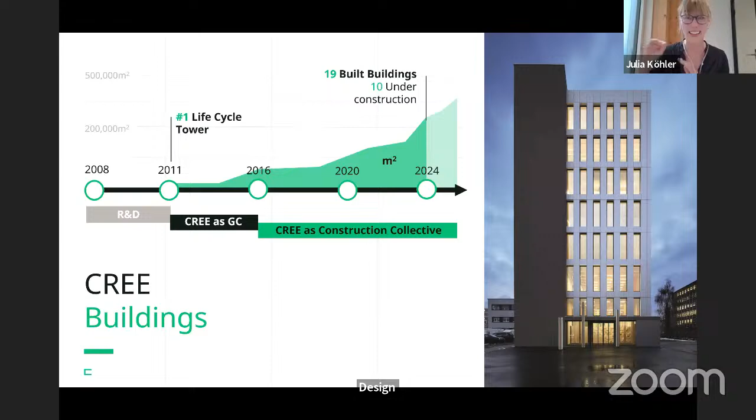That's why we decided to change our strategy and partner up with general contractors all around the world. That's the Construction Collective. In the meantime, we collaborate not only with general contractors but with designers and producers all over the world, and that scales differently than only one general contractor.

All right, so far for Cree's history. Those are the two projects I'd like to show you today.

The one on the left-hand side is the Edge Südkreuz in Berlin, and the one on the right-hand side is the Victoria Park, 1925 Victoria Park, which is going to be built in Toronto at the beginning of 2025. The project in Berlin is an office building, and the project in Toronto is a residential building.

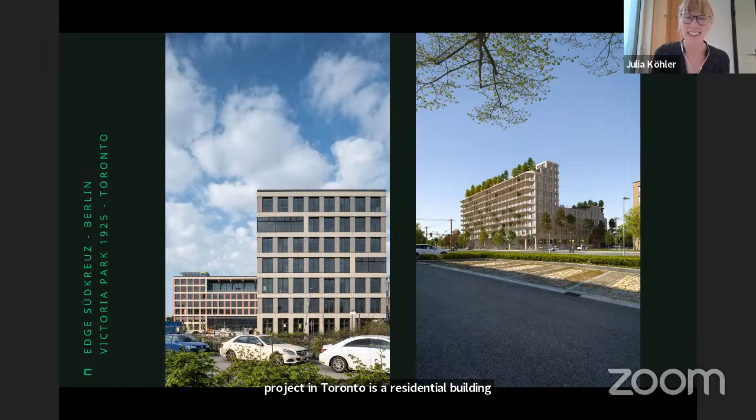So how many elements do you need to build a building? At Cree, we have four key structural elements. Basically, the structure is a skeleton structure.

For the horizontal bracing, we need a core, which is usually a concrete core, but could equally be a steel core or with additional shear walls.

Then the second structural key element is our glulam columns. You see in the sketch that it's double glulam columns along the perimeter and single columns in the corners. Directly attached to the glulam columns are timber frame walls, which are non-load bearing.

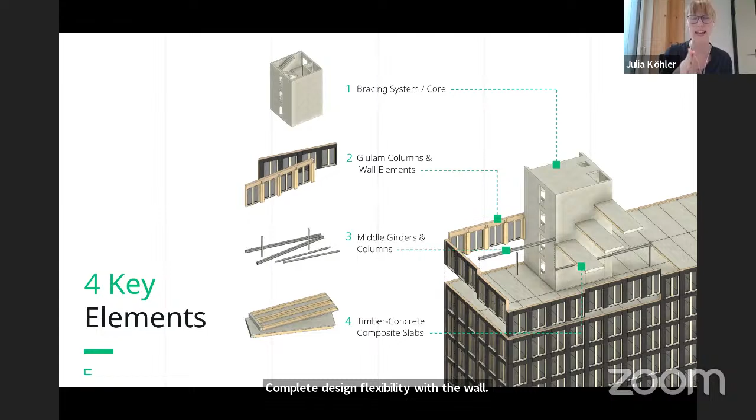So there's complete design flexibility with the wall elements. The third structural key element is our middle girders, just in case the building layout requires greater building depth.

We basically assemble the middle girders, which could be either steel or concrete. And the fourth structural key element is our timber concrete composite slabs. You see it here, it's 4 glulam ribs and then a thin concrete layer on top.

Our approach is not to use as much timber as possible in a building, but to use all materials at their best characteristics to build hybrid, to end up with the most resource efficient structure.

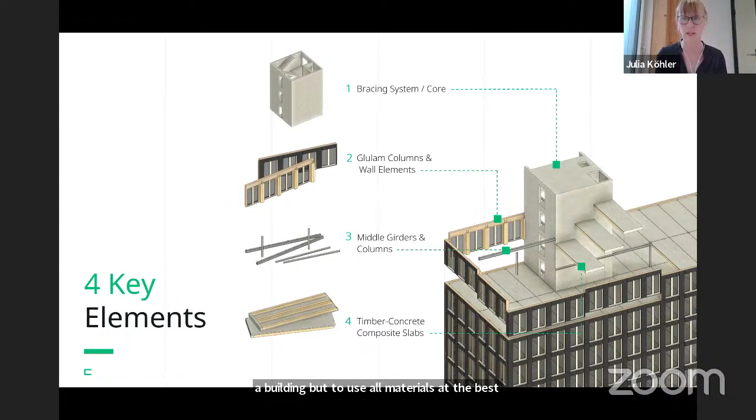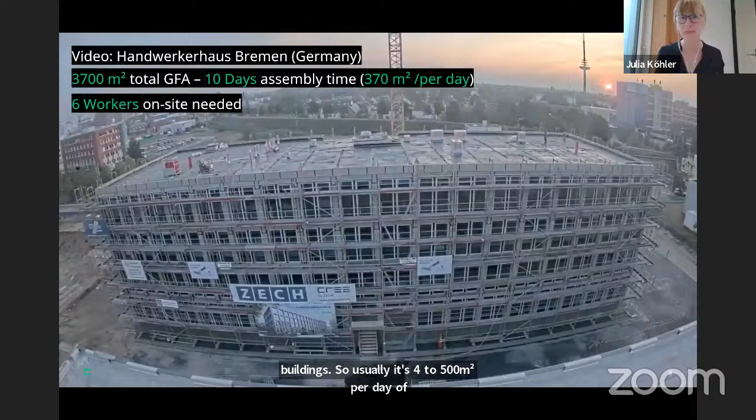This one is one of our buildings, Handwerkerhaus in Bremen. In total, 3,700 square meter GFA, and this building was assembled in 10 days only, so we have a speed of 370 square meter per day. We had even more square meters per day in other buildings - usually it's 400 to 500 square meter per day of weather-tight enclosed floor space with only 6 workers on construction site. So there's 1 crane operator and 5 more people just checking how these fully prefabricated elements come together.

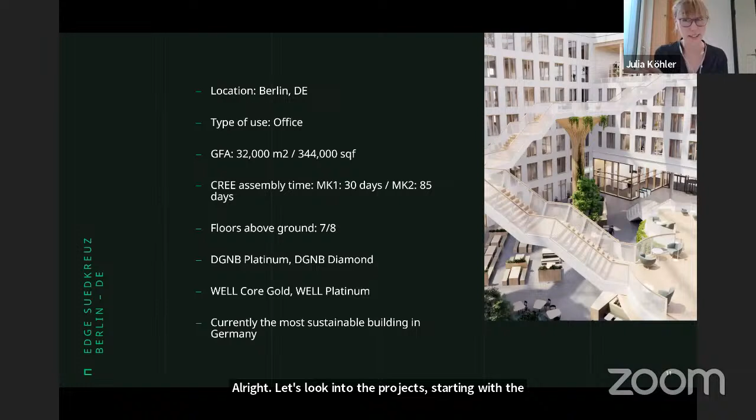All right, let's look into the projects, starting with the Edge Südkreuz in Berlin. Some facts and figures - I'm German, so you'll get some facts and figures from me.

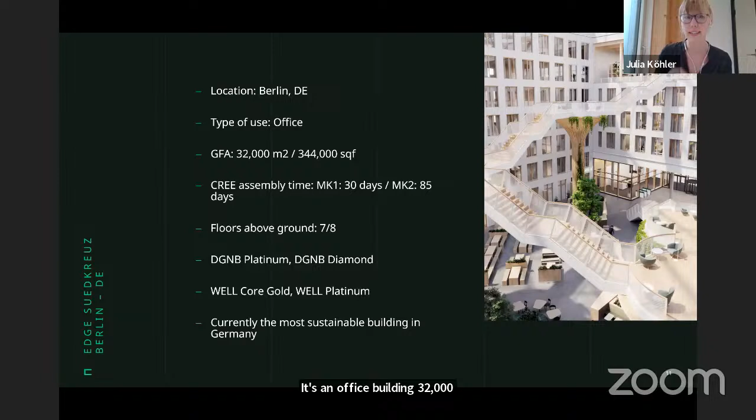It's an office building, 32,000 square meter. Cree system assembly time, what I just mentioned with the 10 days for the other project, was 30 days for the one building and 85 days for the second building, MK1 and MK2. The one is 7 stories, the other one 8 stories. This project won a lot of prizes: DGNB Platinum, DGNB Diamond, WELL Core Gold, WELL Platinum, and is currently the most sustainable building in Germany.

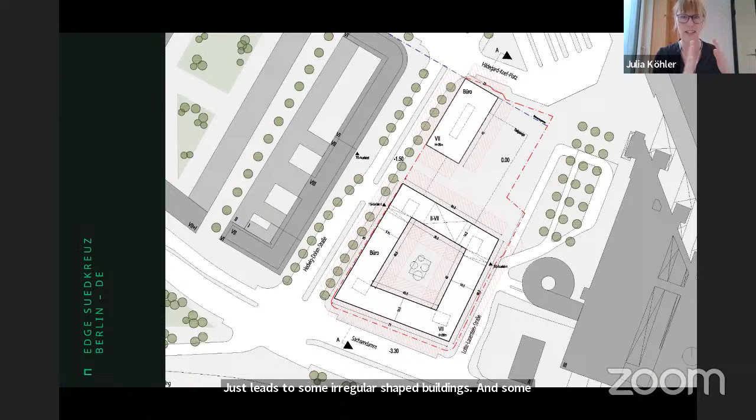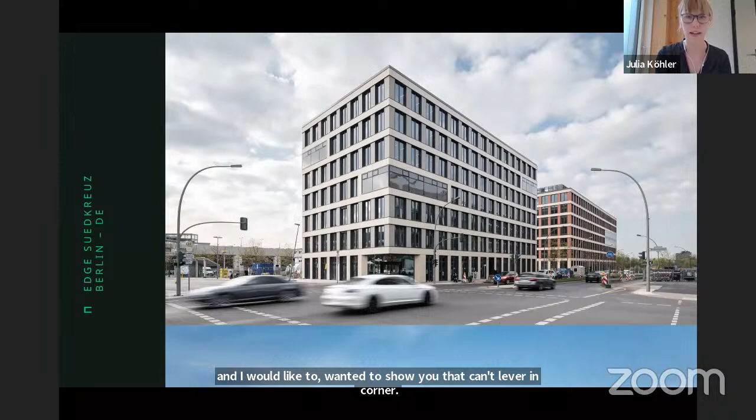So that's the project during construction. Then I wanted to show you some specifics of the project. This is a photo of the rectangular building, the MK1, and I wanted to show you that cantilevering corner which we incorporated in that building, and then for the MK2, that sky lounge. What I wanted to show you with these two is that you can include some special designs in your buildings, even though it's a fully prefabricated system with a very regular grid.

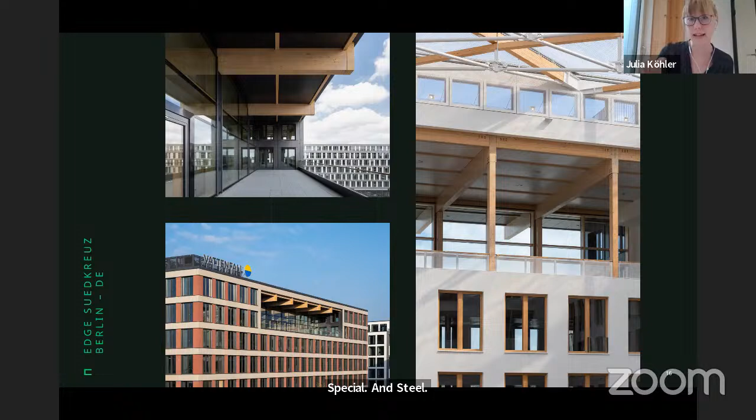So for these two, we just incorporated some special steel structure. This is the sky lounge from the inside and outside, which was timber structure.

And this one is a look into the office building. You see that regular grid of the double glulam columns on the outside, and then the double glulam ribs, which is this very typical Cree look. And then this one is a photo of the atrium in the MK2 with these tree structures, and then with the stairs, you get into every single story of the building.

Okay, the second project I would like to show you today is the 1925 Victoria Park in Toronto. It's a mixed-use apartment residential building, 18,000 square meter in total, 168 family-oriented units and 12 floors above ground.

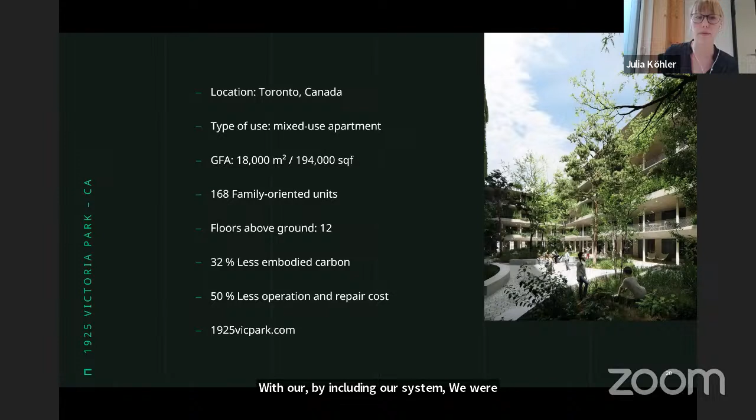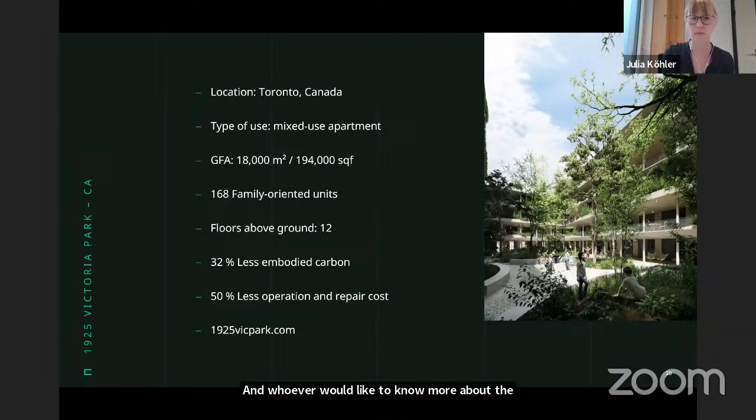By including our system, we were able to have 32% less embodied carbon compared to a conventional structure and 50% less operation repair costs. And whoever would like to know a bit more about the project, I put the project website there: 1925vicpark.com.

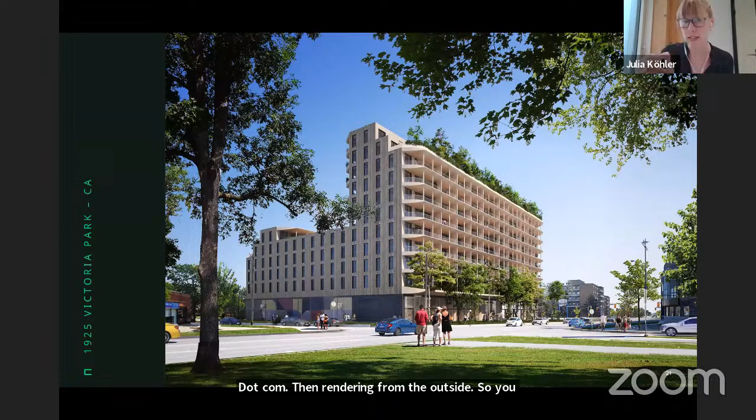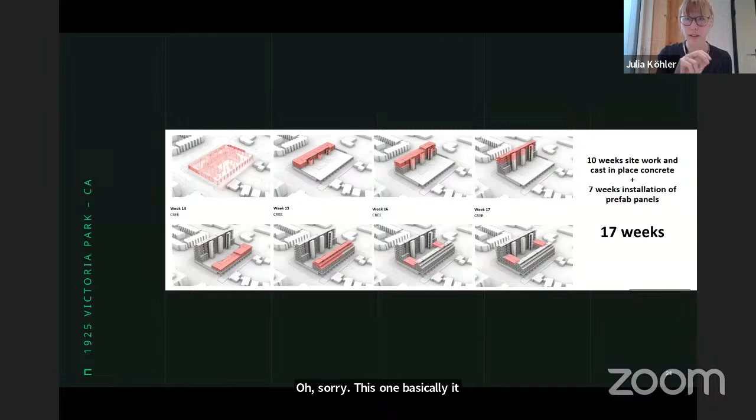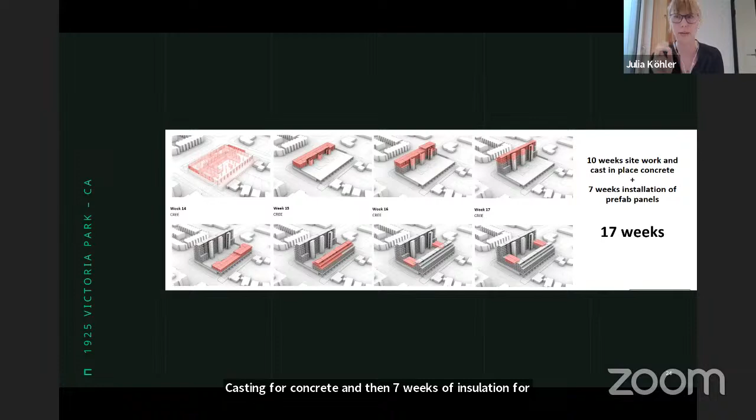And then this one basically shows the schedule for the building, which is 10 weeks of on-site casting for concrete, and then 7 weeks of installation for the Cree system. Remember, it's 18,000 square meter for this very building, and it'll be assembled within 17 weeks total.

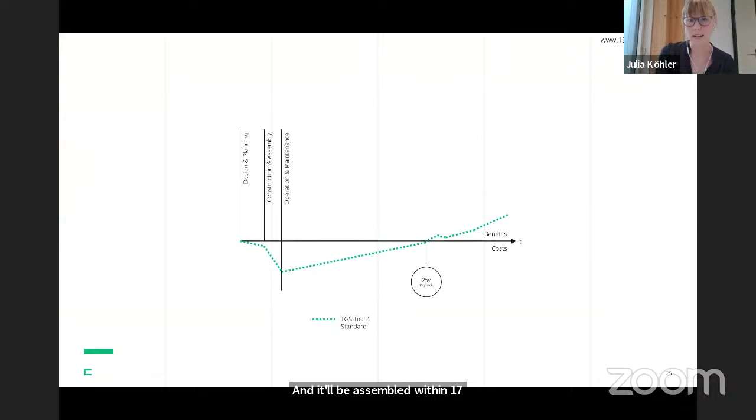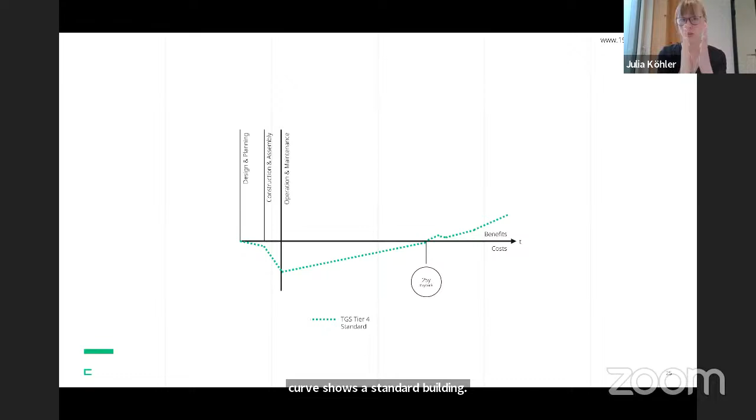And then one thing that I wanted to show you is this very comparison. So for Toronto, there's a TGS Tier 4 standard, Toronto Green Standard. This curve shows a standard building for a design and planning phase, cost and time, construction and assembly cost and time, operation and maintenance phase cost and time, and then the return of investment basically after 25 years.

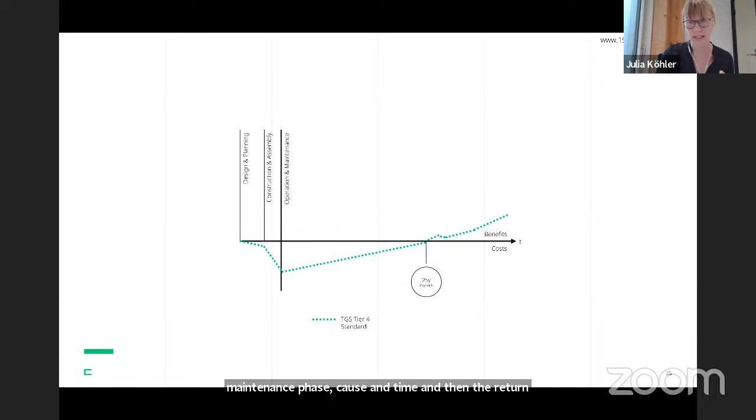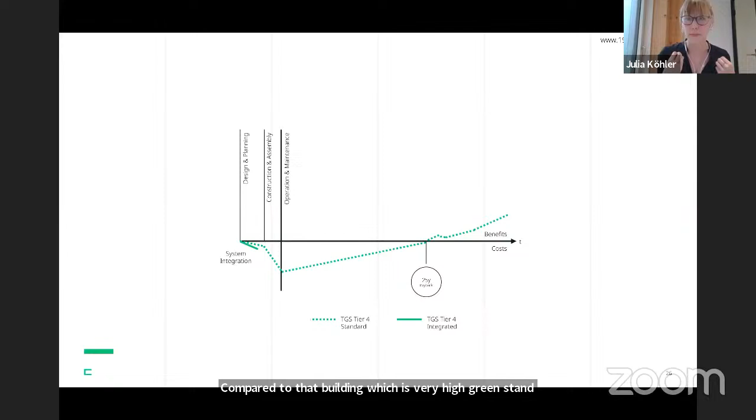Compared to that building, which is a very high green standard building, there's a curve for integration of a system like ours.

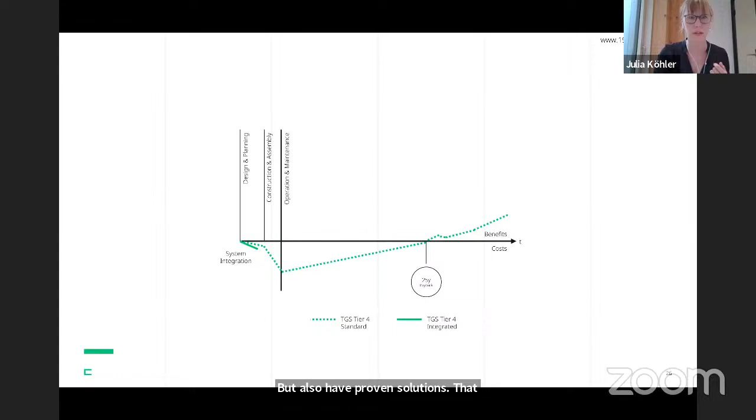The design and planning phase is much shorter, much more intense in the beginning, because we include all the designers from the very beginning, but also have proven solutions that we were able to use whilst designing the building.

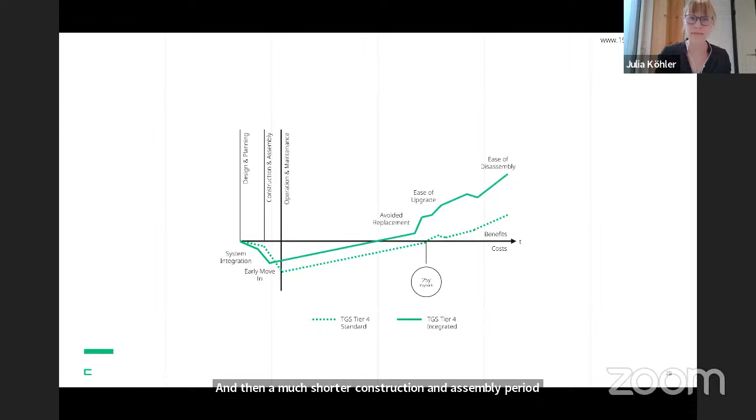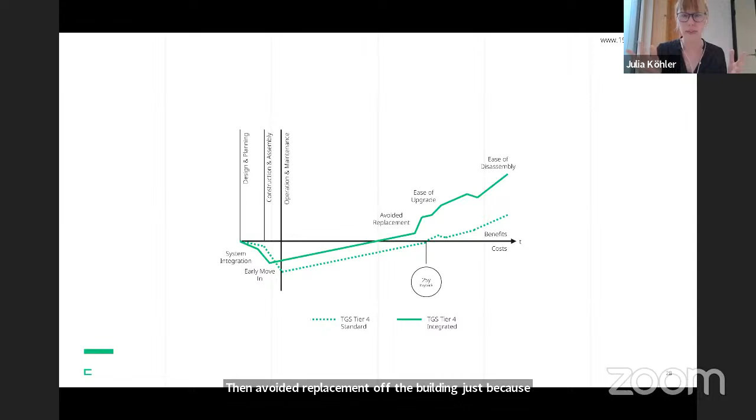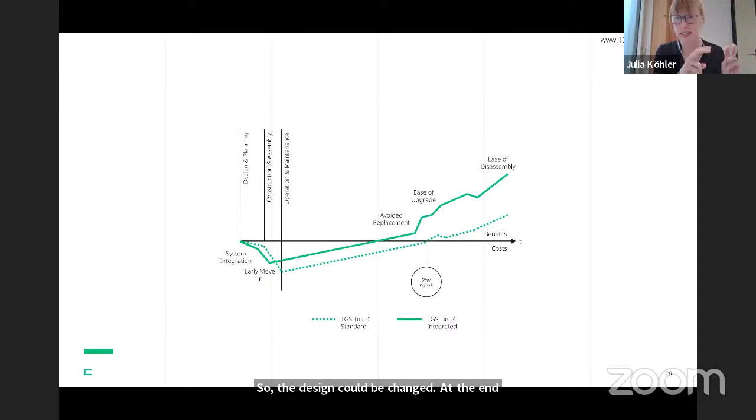Then a much shorter construction and assembly period, early move-in, and then much lower cost for operation and maintenance, then avoided replacement of the building, just because the interior is an entirely column-free space. So the design could be changed at the end of the first life of that building, ease of upgrade, and then also ease of disassembly, because our system can also be disassembled and the entire building elements, for example the slabs, can be reused in another building. And we have done that already.

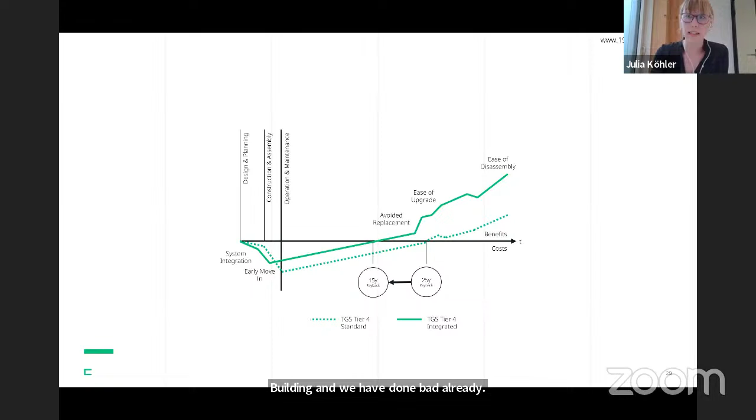Which leads to a 10-year earlier return of investment for the building 1925 Victoria Park.

Then the last part, mentioning some of our KPIs. I've mentioned it already a couple of times, timeline. By integrating all the design trades at the very beginning, we have that very intense design phase. And what's important with that is to have some design freezes, where it's not possible to change things, because the later the changes, the more costly the change is.

And we have the offsite production in parallel with on-site installation. With that, we're 20 to 50% faster. We can deliver the project 20 to 50% faster.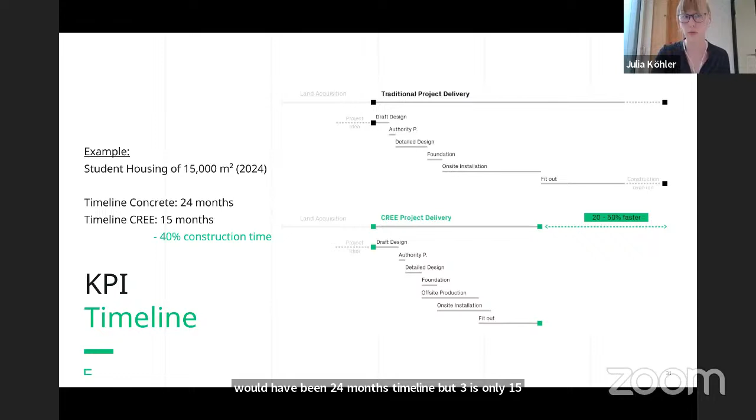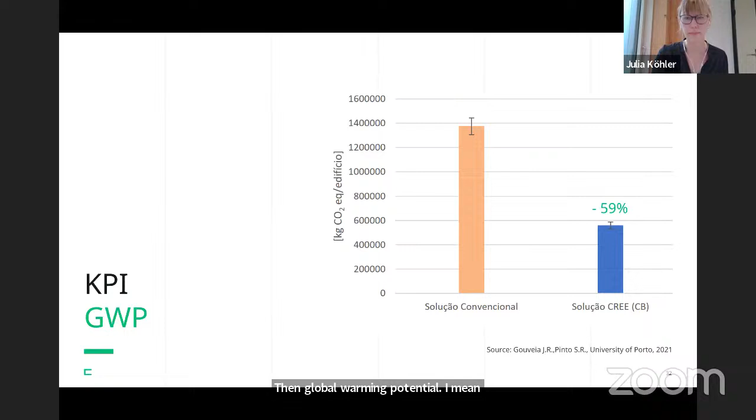Then global warming potential, an example of a project in Portugal. Minus 59% of global warming potential with partial replacement of concrete with structural timber, less concrete in the foundations, less steel, and less energy and water consumption on the construction site.

KPI asset value, according to the US Green Building Council, a building like CREE has a higher value, with an increasing number of building owners seeing a 10% or more increase in property value.

And the last one regarding rental income, rents for LEED certified buildings are 5.6% higher than for non-certified buildings. I could continue telling you more about these KPIs, but I'll finish here.

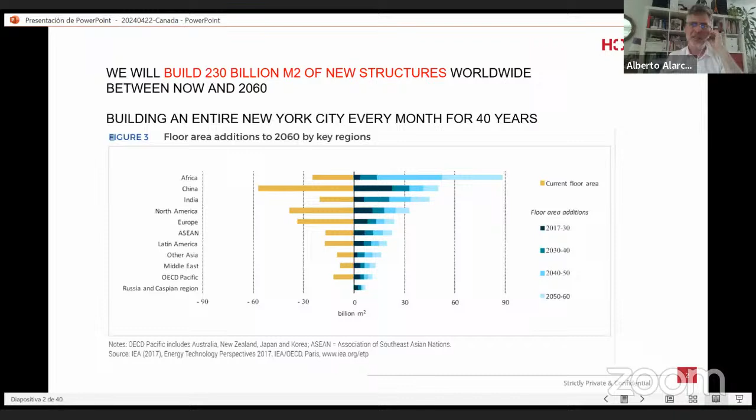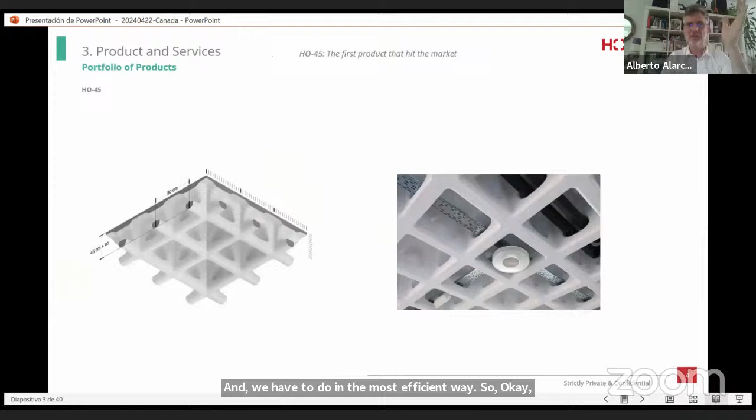Okay, I'm Alberto Alarcón. I'm director of Holedeck. Basically, the problem is we have to build 230 billion square meters of new structures from now to 2060, and we have to do it in the most efficient way. So our company has been developing molds to manufacture the most sustainable concrete structures that can be done.

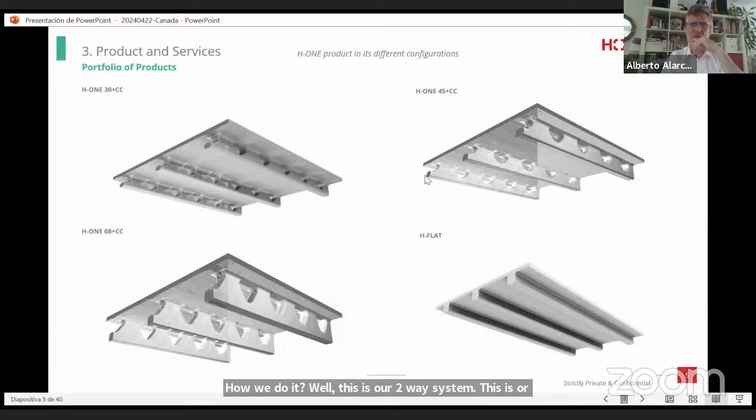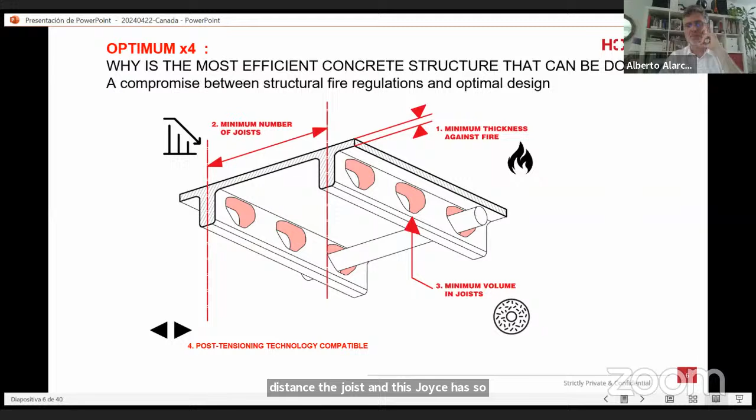How do we do it? Well, this is our two-way system, and this is our one-way structural system, made with concrete. Basically, we have adapted a minimum for the compression layer that depends on fire and acoustic regulations, and we have separated the maximum distance of the joist, and this joist has some holes that allow services to pass through them. With this solution, we can cover a range between 6 meters and 22 meters.

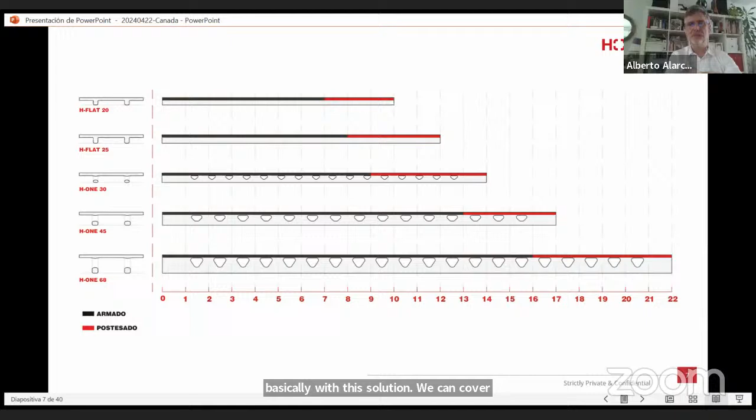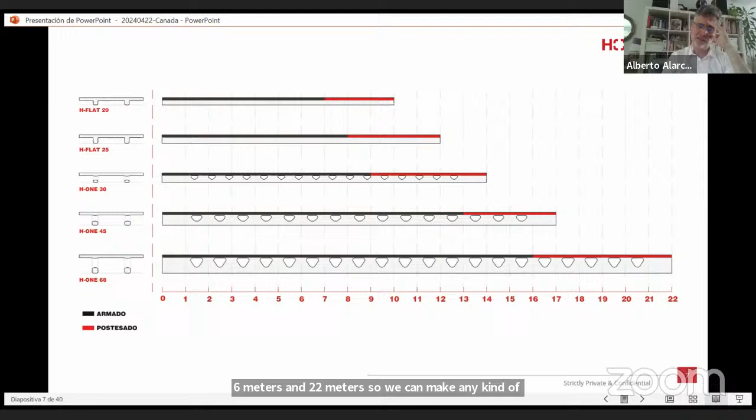So we can make any kind of building, housing, industrial, offices. We have developed different technologies like precast technology, semi-precast technology, and precast technology including timber for the compression layer. Our construction system can be used anywhere in the world. It uses conventional concrete, conventional steel, conventional man labor, and it fits with any industrial culture anywhere in the world.

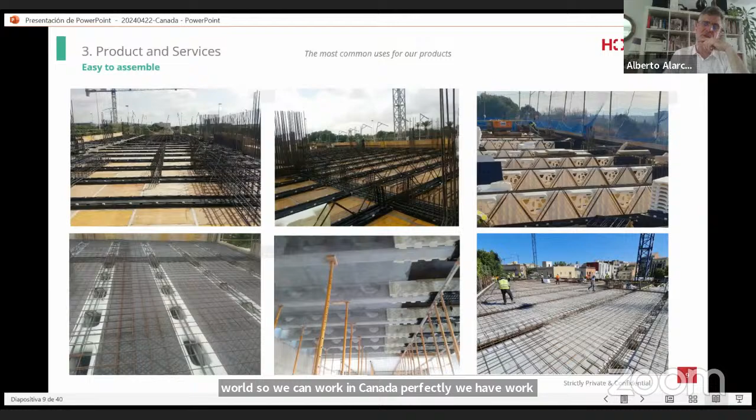So we can work in Canada perfectly. We have worked already in the United States. We have worked already in Latin America and Europe. So we are open to work anywhere in the world.

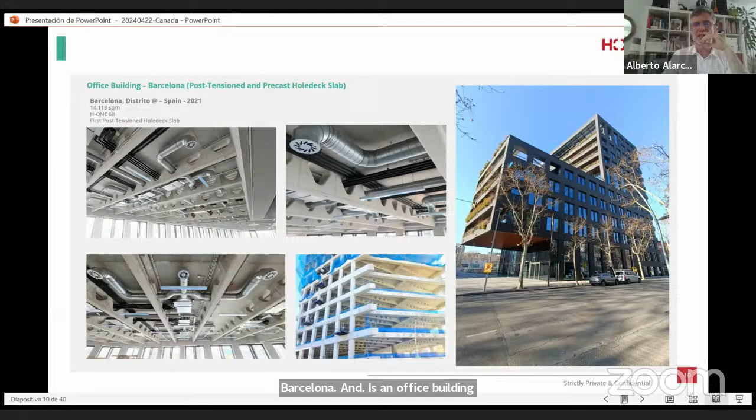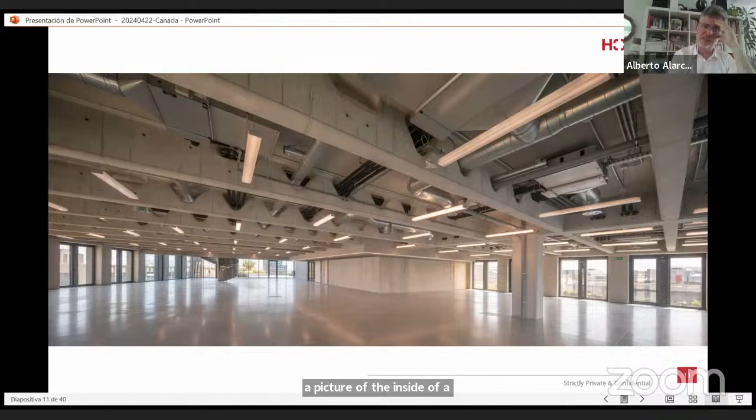I'm going to begin with a building that is placed in Barcelona. It's an office building, and this building has spans of 19 meters. You can see here a picture of the inside of the structure. It's a small tower, and we used here our molds.

They were precast on site, and they were post-tensioned. So we got a consumption of just 0.17 cubic meters per square meter. That is nothing for nearly 20 meters.

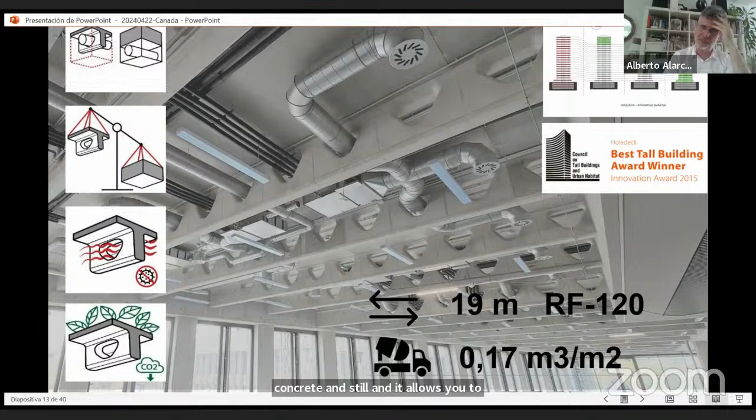As you can see here in this picture, we cover the 19 meter spans, but at the same time we can integrate the services inside the structure. So it allows you to save height in the building. It allows you, of course, to save concrete and steel, and it allows you to save suspended ceiling and other elements. At the end, you can see here in this picture, compared with a conventional solution, we can save around 20% of the total height of the building, just integrating the services within the structure.

Of course, the solution is lighter, around 50% lighter than the conventional slab. You can save on columns, and you can save on foundations. And if you save on concrete, steel, suspended ceilings and other elements, you are reducing the total cost of the building and the total cost of the structure, of course.

You can reduce the cost of the structure around 50%, the cost of the whole building around 20%, and you reduce the embodied carbon. It can be around 40% in the total building.

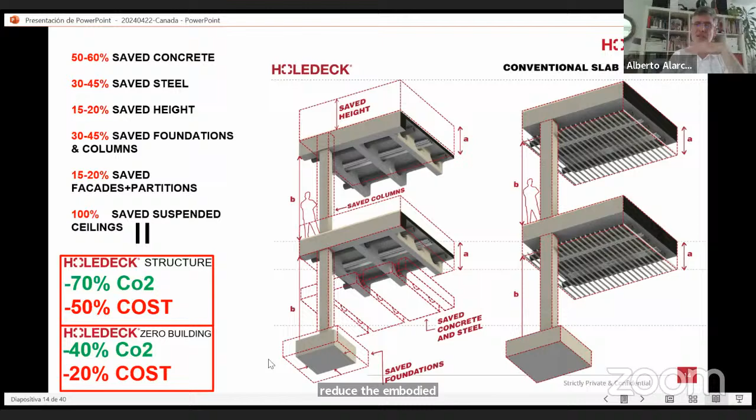So Holedeck is not just a structure; it means a lot for the whole building. You save height, you save suspended ceilings. You can reduce elements. You can increase the speed of construction. You have a big flexibility for designers.

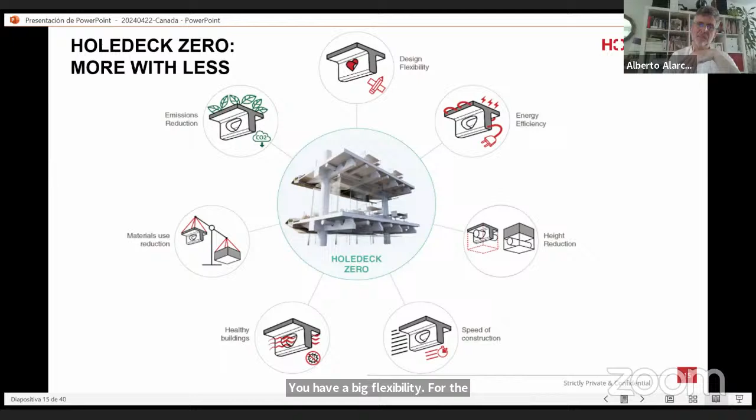And basically, we talk about a concept that is Holedeck Zero, where we integrate developers, designers, and all players to make this objective possible: not just a structure, but a building that is cheaper and more sustainable than any conventional building.

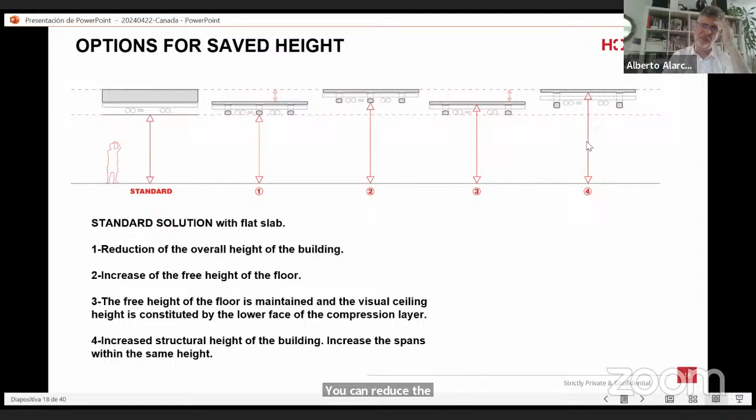Well, another important thing to remember is that you can use the savings of height of your building as you want. So these are different possibilities. You can reduce the height of the building. You can increase the free height. You can use different philosophies.

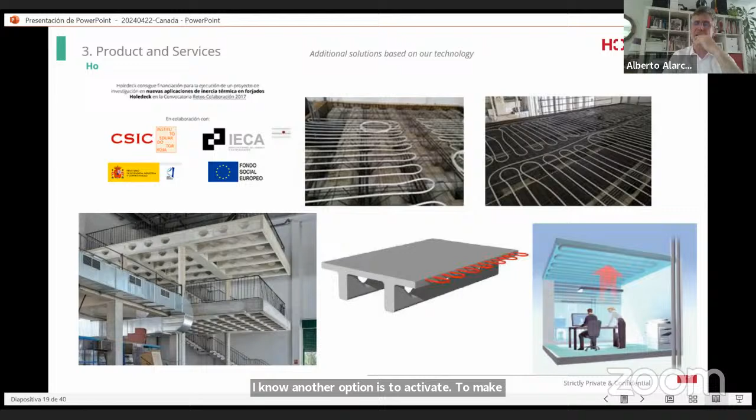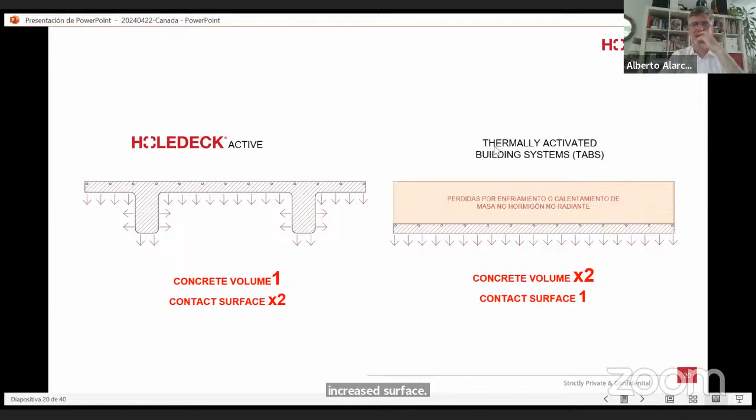Another option is to activate thermal activation of the slab, where you can get half of the volume of the conventional slab and an increased surface. So it works very well for thermally activated systems.

If you compare with other conventional systems in concrete, of course, Holedeck is the most efficient way to make a concrete structure. We have checked it with different engineers, and it's impossible to make a lighter structure. If there is any structural engineer here, I can talk with anybody about this. It's impossible to make a more efficient structure in terms of material, following the regulations.

But the solution is so effective that it can compete with steel in weight, and it can still compete even with the whole solution of, for example, a CLT solution. It can compete in embedded carbon. We are competing in some projects.

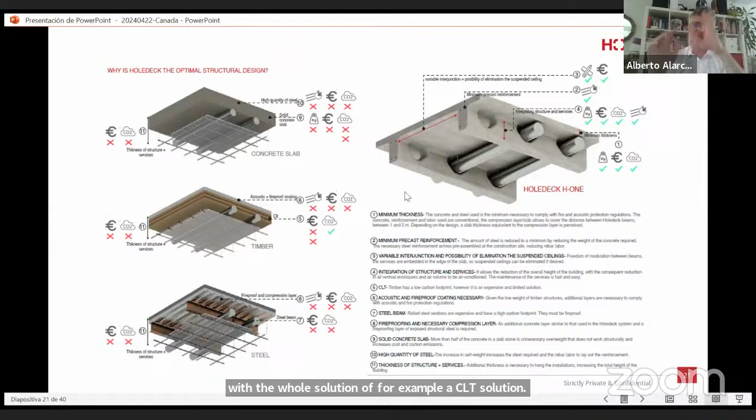So we began with this, the beginning of the company, the two-way systems. And we have moved to the one-way system. This is another sample.

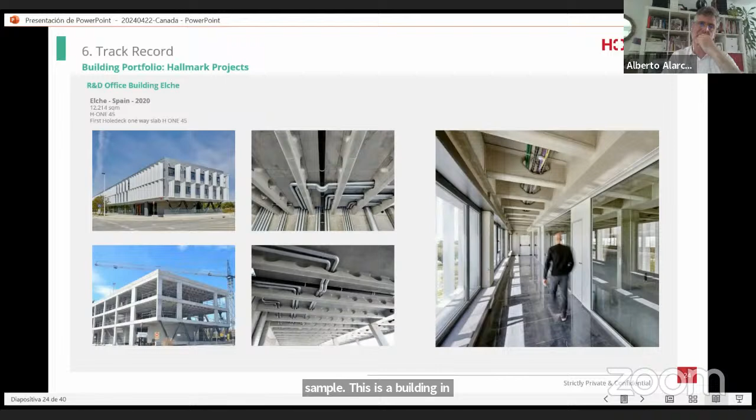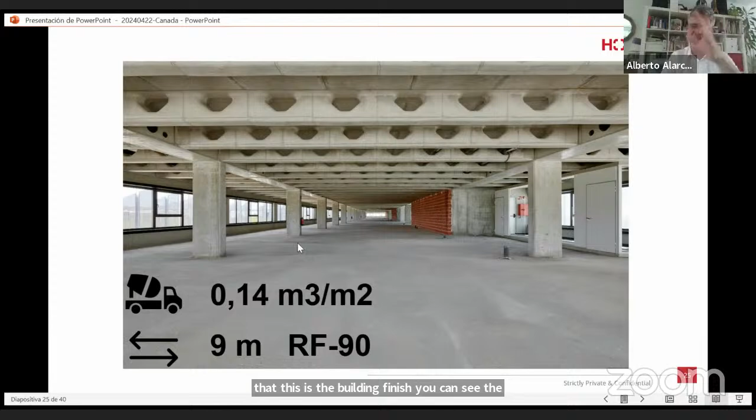This is a building in Elche, in Alicante. And here it's very interesting because we make a core and shell concept; this is the building finish. You can see that there is nothing. There are no services. There is no other element.

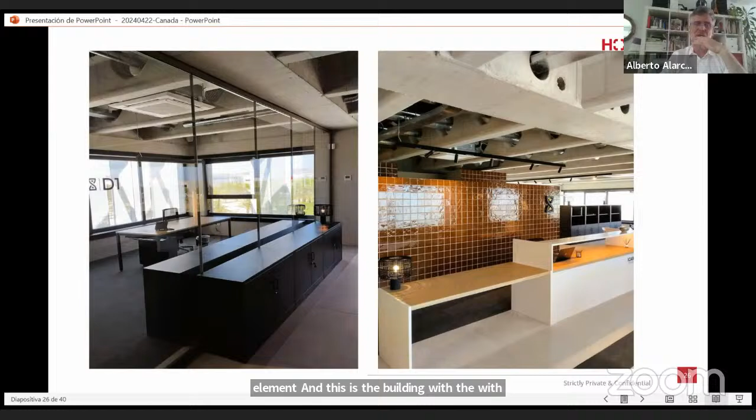And this is the building with the companies inside. And as you can see here, it's a very cheap solution. All the services and structure are completely integrated.

And well, you can see here with the whole building finish, there are different solutions for service and structure integration. Different philosophies. It depends on the designer, the architect, or the engineers.

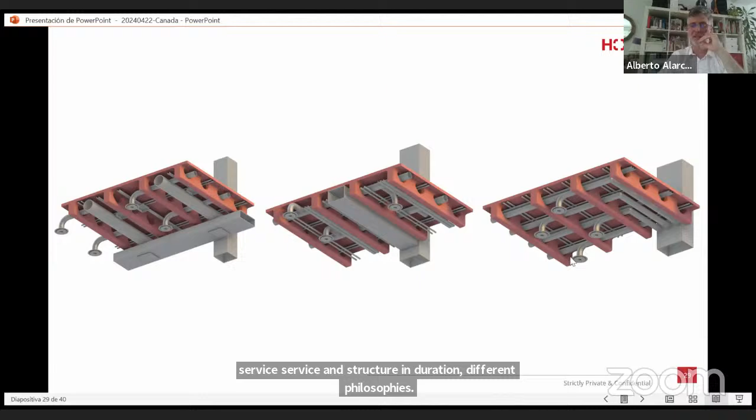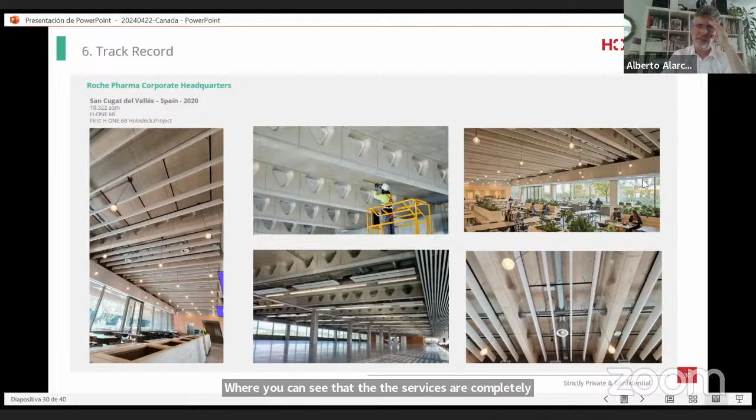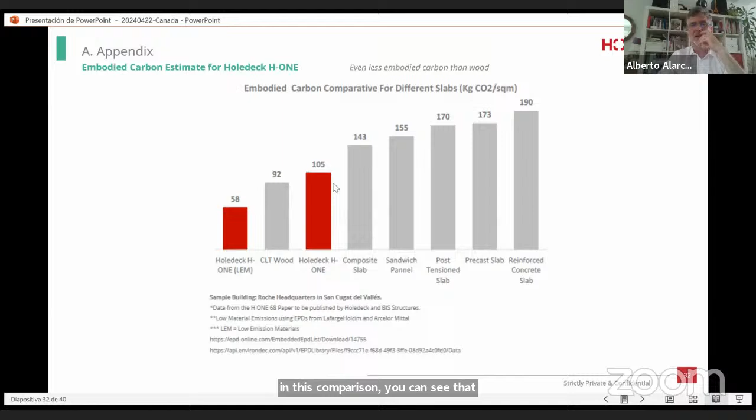This is the finished building without the suspended ceiling. And in this comparison, you can see that CLT and Holedeck solution can be very competitive in carbon, in embodied carbon.

Holedeck is compatible as well with low emissions concrete.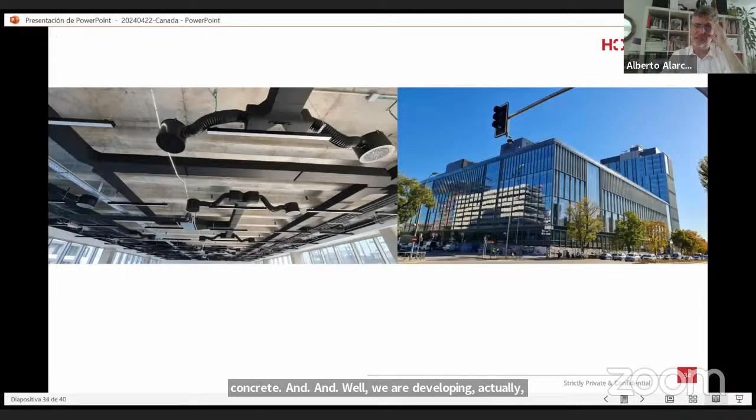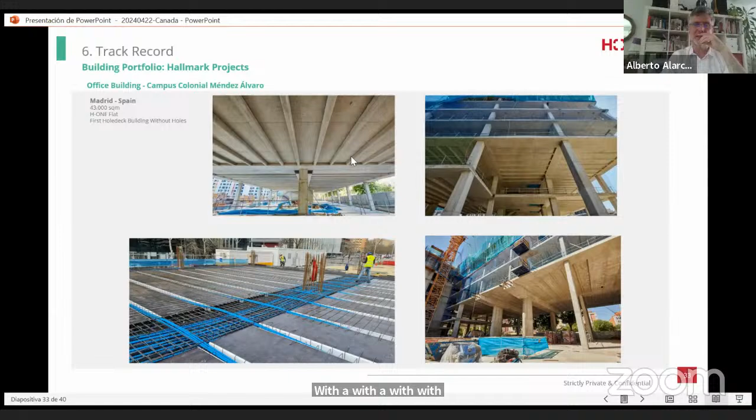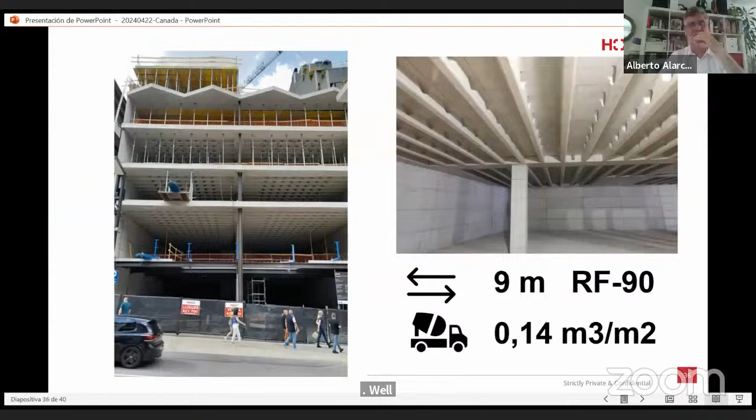We are developing actually other different solutions with flat beams, and you can see that the service integration is perfectly possible as well. We are developing housing. Holedeck is compatible with a lot of different geometries and systems. Well, thank you for your time.

Our philosophy is more with less. Basically, our idea is that sustainability is related to optimization, to trying to avoid as many constructive elements, concrete, steel, and any other constructive element. Thank you.

Okay, so this is just a little bit more showing our work, and we're really bringing in natural elements, natural stone. We can do cool, iconic buildings too out of brick masonry. You can see these naturally locally quarried sandstone lintels and stone sills here, really hearkening back to a more traditional aesthetic. But it can also be updated and kind of new and fresh.

And we applied a lime wash to this one here, and can build beautiful architectural pieces. I just love brick because it's the size of the human hand, and you're really sculpting when you're using it. So it's both artistic and functional. Just showing some other work.

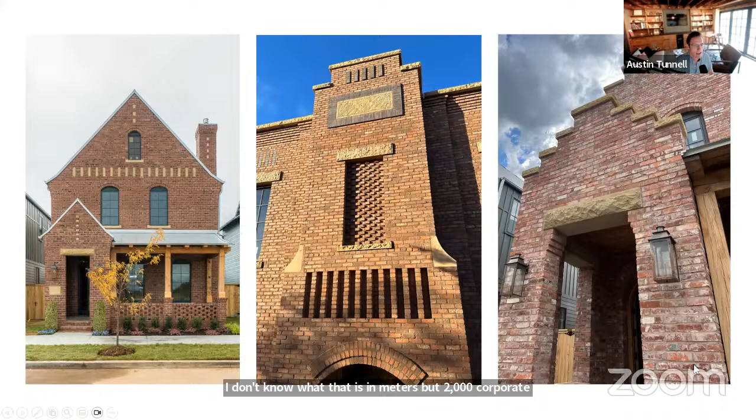This is just a normal 2,000 square foot house, more of a commercial building here, and another home over here. This is the interior of that house I just showed you. It's 2,000 square feet total, 1,000 square feet each floor, not super big, 3-bed, 2.5 bath.

It's almost a townhouse, even though they're separated, but this could be a townhouse. We love putting this interior arch inside, one, to bring the masonry inside, to experience the architecture, and two, because it's a small house, so it's an open floor plan, but it's also providing a transition between spaces. This was actually reclaimed, salvaged brick, 100 years old.

This building is where we really started innovating on our insulation. I'm going to show you a wall section where we're using 2 double wythe walls, wythe just being 2 layers of brick. So you've got 2 wythes here and 2 wythes over here. In between, we've got mineral wool, which is rock and slag, byproducts of metal making, so it's kind of a recycled material.

We like it because it's inorganic and hydrophobic, meaning it's the opposite of a sponge - it doesn't absorb water, it lets water run through it. It's also vapor open, meaning water can move in and out, because these are mass wall systems where the masonry carries water and distributes it throughout the wall. You don't want to seal off one side where it can't breathe - you really want to let water vapor move in and out. That's why we use this insulation.

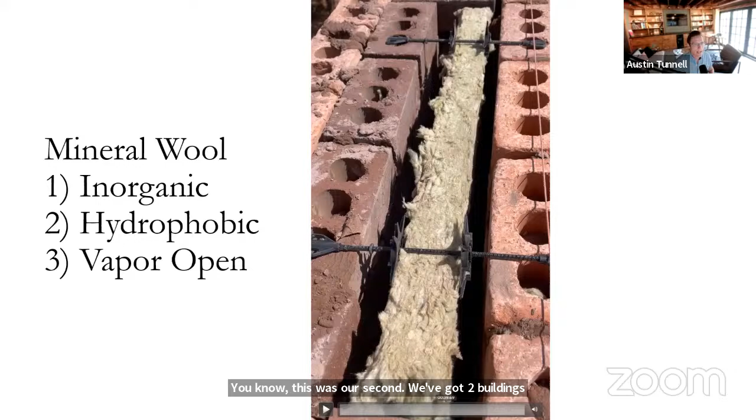So we've got a lot more exploring to do here. This was our second - we've got 2 buildings like this right now, and we've got a number coming up soon. Now I'm going to share a little bit of stuff that's not my work.

Last summer I was in Spain near Madrid. We went to Segovia to study historic masonry structures, and we were learning some old school thin masonry tile vaulting. This is a completely unreinforced structure - where we're standing is 1 inch, about 3 centimeters, just one single layer of these thin tiles. The only reason we have this strap around is because our buttressing isn't really anchored to the ground. This could be laid incredibly quickly.

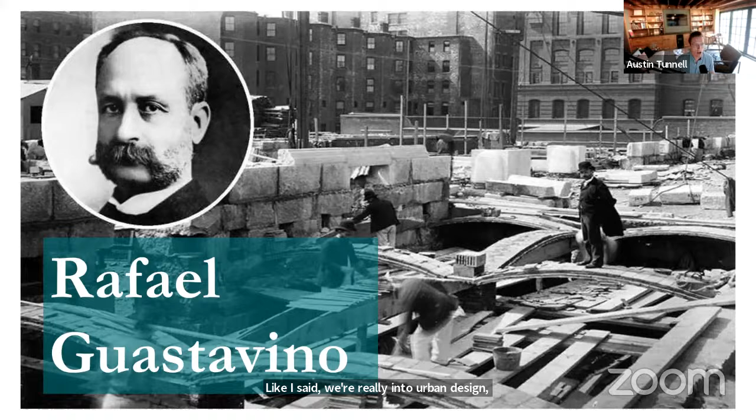Fast setting gypsum mortar - this is really a continuation of Gaudi and Guastavino and things like that. Guastavino is someone I'm very interested in, and something Building Culture will be exploring more and more. We're really into urban design, architecture, construction, and some engineering, but ultimately we want to bring engineering in-house and really start working on these more complex forms of tile vaulting.

But what Guastavino was doing was amazing. He's a Spanish master builder, architect, builder, and mason, who emigrated to the United States in the late 19th century. This was his first project - completely unreinforced, no steel, about 3 inches thick, 3 layers of these thin clay tiles. You can see he started exploring domes.

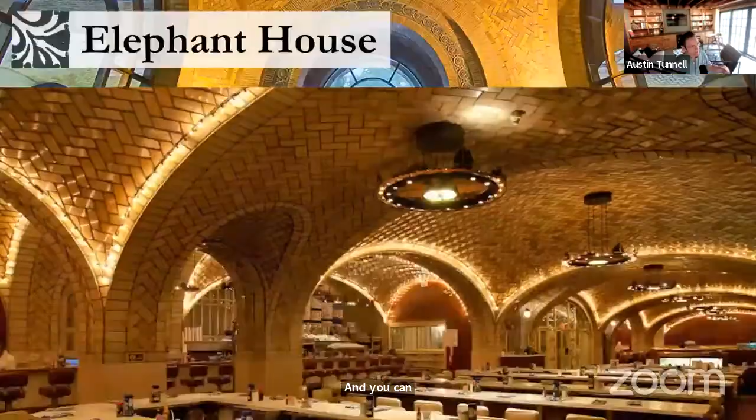This is a really famous restaurant under a New York City subway station. Once again, millions of people walk over this, no steel in it whatsoever. This is the first subway station in New York, starting to play with different patterns and colors, really making it beautiful as also part of the structure.

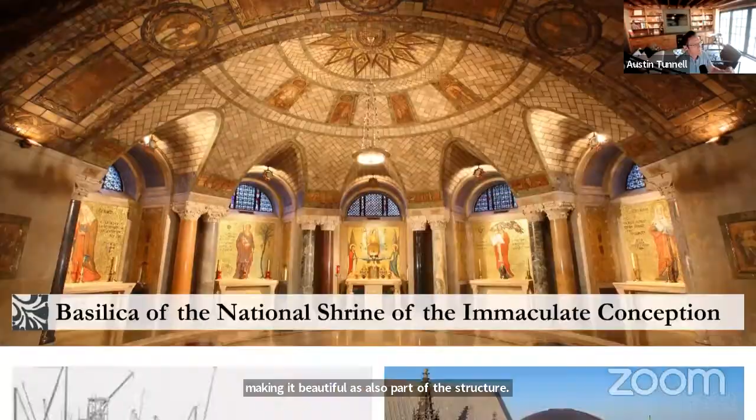Just really, really incredible stuff. And I'll share this one. This is really interesting. This is St. John's in New York, the 4th largest cathedral in the world. And this dome in the middle, his son erected that in 15 weeks, and it's 130 feet in diameter. What is that, like almost 45 meters or something.

So Santa Maria del Fiore in Florence, the Duomo, I think it took 12 or 15 years to build that dome, and it was barely any bigger - like 140 or 145 feet compared to this 130 feet. Once again, completely unreinforced. This was supposed to be a temporary structure, but he put this up 100 years ago and it's still there. I can't remember if it's 3 or 5 inches thick. Just unbelievably efficient. What he's doing is strength through geometry, getting the geometry right and then letting the forces flow through that.

I'll show you this last one. This is a helical staircase at Carnegie Mellon University in the United States, and you can see the structure of the staircase right here - these three little tiles right here, that's it. Once again, no steel in here. This staircase has been here almost 100 years, and just really unbelievable work.

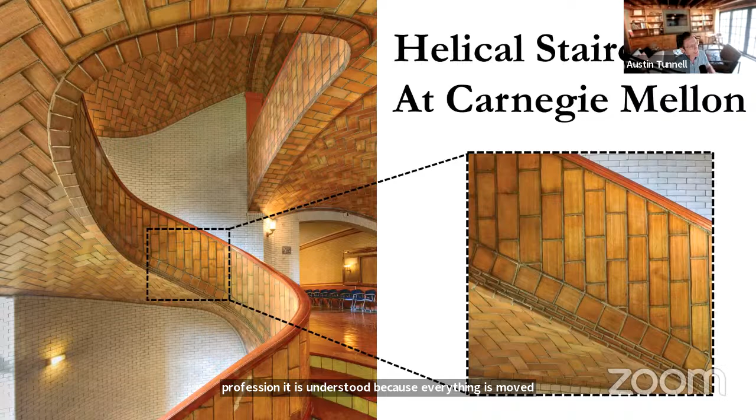This is not really allowed today by code because, I'll say there are some people out there that understand it, but in the mainstream engineering profession it's not understood because everything has moved to tensile strength and steel. A lot of this was from an old presentation, but tile vaulting is kind of dead in the United States. Yes, there are a few projects here and there, but it just kind of disappeared all of a sudden in the 1930s, 1940s, when the Guastavinos died.

One of the professors at MIT, John Ochsendorf, says that at a place like MIT you could easily fall prey to the idea that we are at the pinnacle of all time, that we are at the height of technological achievement in the history of the world. That's probably true with respect to understanding the human brain, but there are also lost arts - they could do things that we are only beginning to understand and appreciate today. One of those things, in my opinion, is this structural masonry, clay tile vaulting, really understanding geometry and being able to make hyper efficient structures.

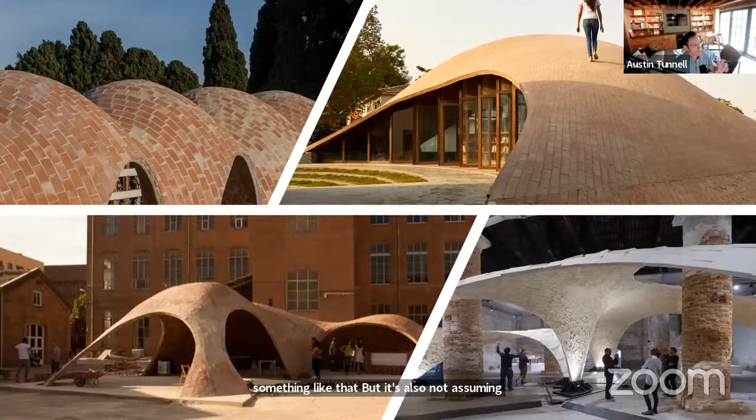This is a brand new structure right here, once again completely unreinforced, using geometry - look at what they're stacking on it and it's able to hold. That's what I think about a building culture. It's not just being nostalgic and copying what happened in the past, building as the Romans built or something like that, but it's also not assuming everything new is better. It's really that idea of blending the best of old and new, and these are new structures being built today that they're experimenting with.

I want to show you one more. This is a concrete floor system by Philippe Block and Block Research Group out of Zurich. This is the bottom of the floor system - this is all molded concrete, 5 pieces that are then craned into place. Just like Alberto was talking about, the speed of what they're able to do is incredible. There's no embedded steel in here whatsoever - they use a little bit of tension ties, so it reduces the steel by about 90%. That steel is external, so it can be maintained.

And it all works in compression - there's curvature to all of this. It all works in compression rather than trying to make a masonry material work completely horizontally, which is not really intended to work. You can see the connection here with the rib vaulting of, say, King's College in the UK - look at that similarity to what they were doing. So they were doing this 500 years ago and now innovating on this today using it with concrete, really efficient. And he's doing this in the real world now too.

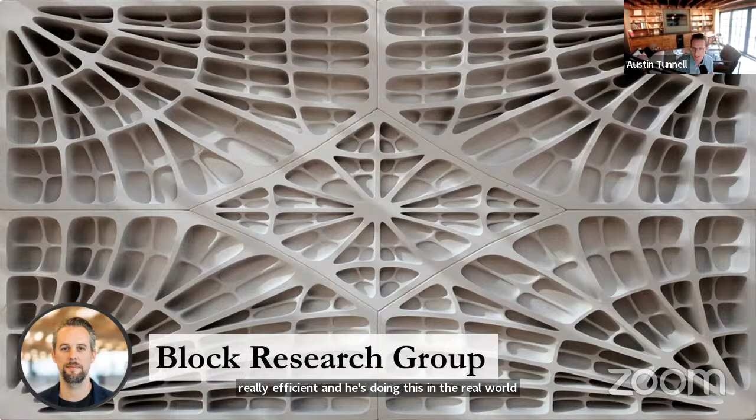Not that we are doing this yet, but I hope in the coming years, 5 to 10 years, that we are able to bring this to the States and also be doing this. And that is all I've got. Thank you.